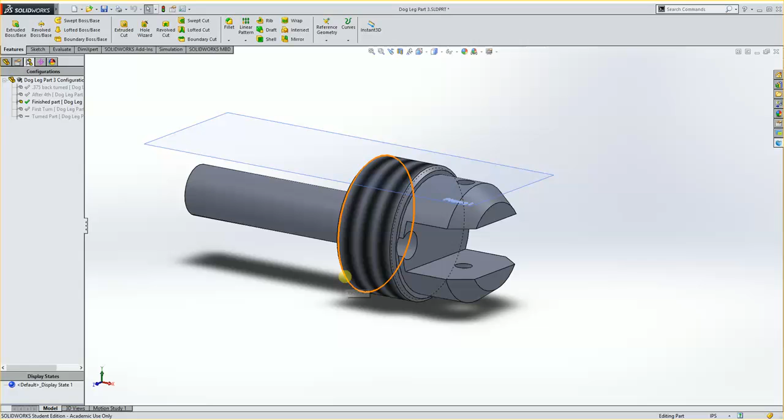Part number 3 here has actually quite a few setups that have to get done to it. If we just go ahead and try to turn the shape and then put it in a fourth axis and do this milling, it ends up not being very rigid because of this 3/8 diameter here, and you'll have a hard time doing it. So the best way to do it is to pre-turn it, like rough turn it to a little bit larger diameters everywhere.

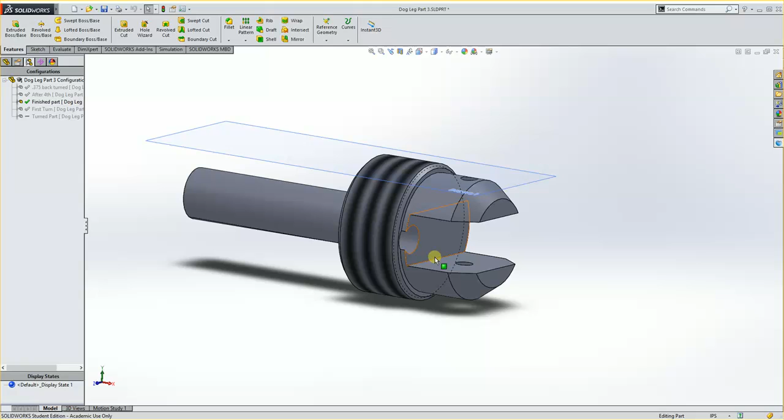Then fourth axis it to put this slot through it and this hole through it. Then put it back in the lathe, holding on to this 1-inch diameter and turning this 3/8 diameter down. And then turning it around in the lathe, putting this in, and finish turning the rest of this shape, and then threading it. After that, you'd have to set this up into another mill or something and put this hole in it, but I won't go through that particular part. That's something you can do on your own.

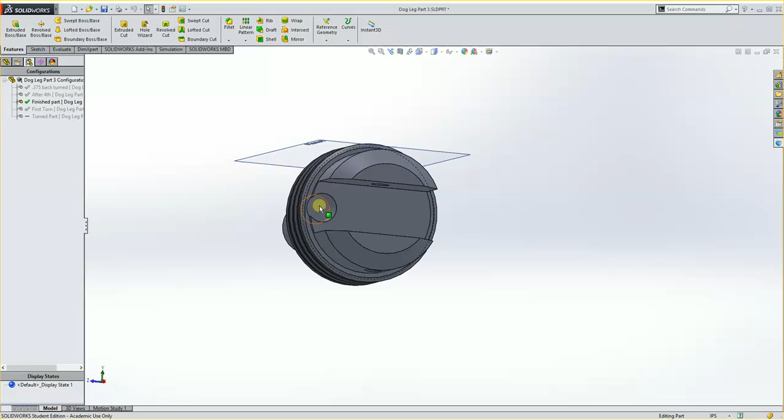So as a little introduction to how we're going to do this, we're going to make multiple configurations in SolidWorks that we will utilize for our simulation purposes, but also for material removal purposes. And I've already pre-created those just to show you what they'll be, and then I'll show you how to actually do them after you get an idea in this introduction.

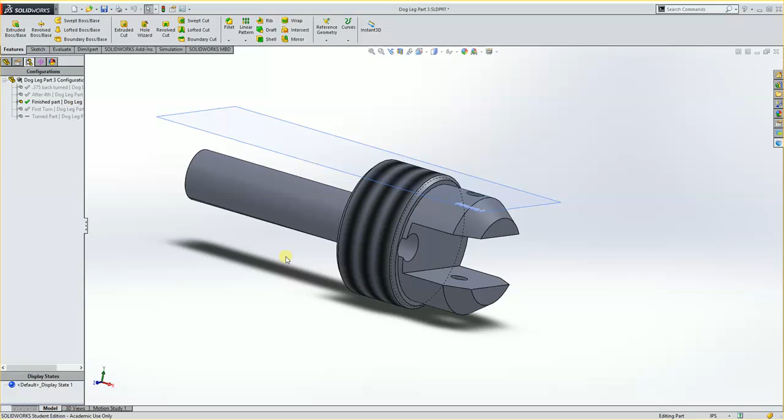So this is the finished part. You see how it is here. This is a 1-inch diameter. This is 3/8. This I think is like .880. And you'll see we have these little steps here and here. We want to maintain those steps so that we can use them as bump stops in the lathe when we get it to set up.

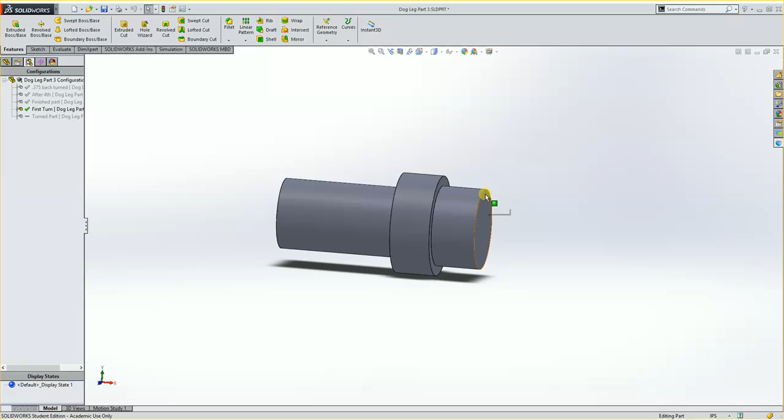So what we'll do is we'll first make a part, and I made it here. I think it's called, let's see, first turn. We're going to turn a part in a lathe that looks like this. So this will be the front of the part. We'll come back here, turn this diameter, and then back groove this diameter. So we'll turn most of it out, and then we'll just come in and back groove this portion. All this will be turned down again later.

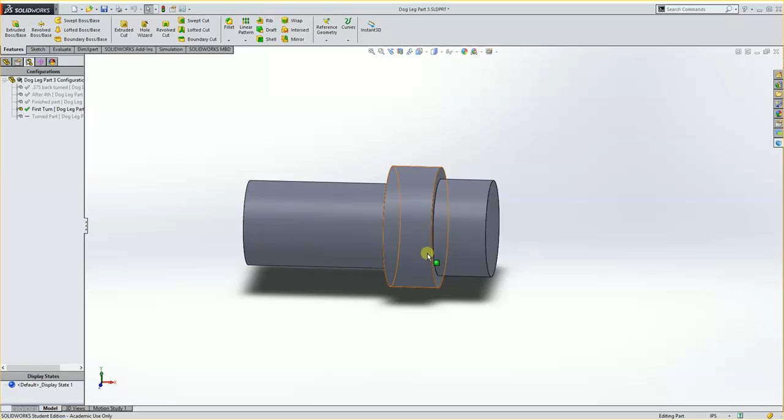Then what we'll do is we'll take this component and we'll put this in the fourth axis rotary, and we'll be able to slot through here and drill this hole. We can use this as a bump stop. This has plenty of rigidity for the work we're going to do, and that will end up looking like this after that's done. So you'll see the slots through here, and we end up having this hole come down through here.

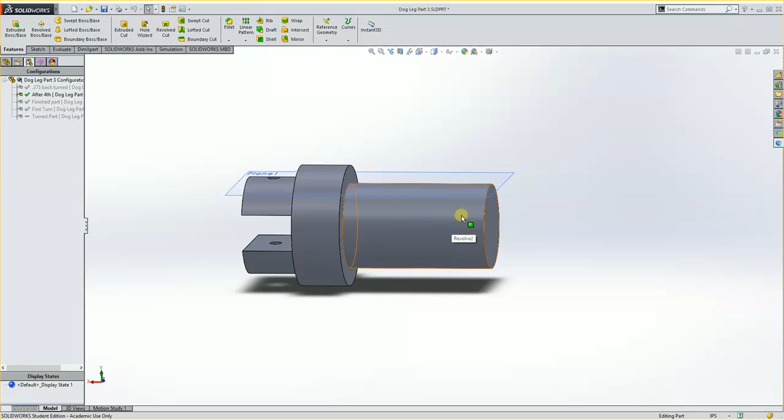Then we're going to take it and we'll put this diameter into the chuck on the lathe. So it'll end up being like this. It'll be chucked up in the lathe, and we're going to turn this down to 3/8. So it would end up looking like this. Then we turn it back around and put this in the lathe chuck.

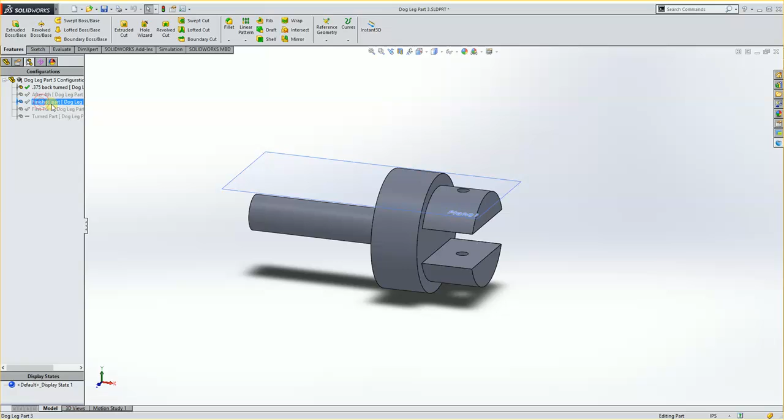And you'll see here we have plenty of material we have to remove here yet. This is oversized, this is oversized. So we would take and we would turn that shape down and we would thread this. And then that would end up giving us basically our finished part, like so, minus this hole. We won't have that hole in there yet. So that is going to be our order of operations that we're going to do. So in the next video I'll show you how to actually get that.